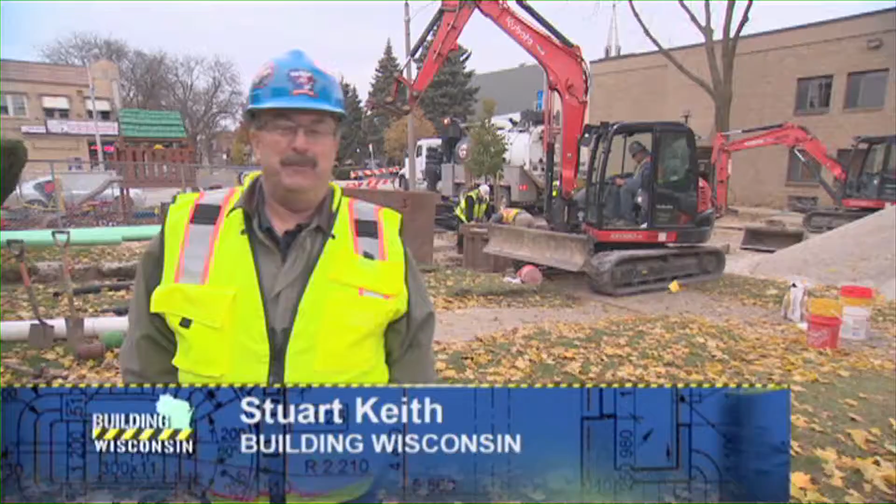Welcome to Building Wisconsin. I'm Stuart Keith, and on today's show, we're learning why and seeing how many sewer laterals are being replaced in the Milwaukee Metropolitan Sewerage District. So let's get started with Steve Breitlow from Plumbers 75.

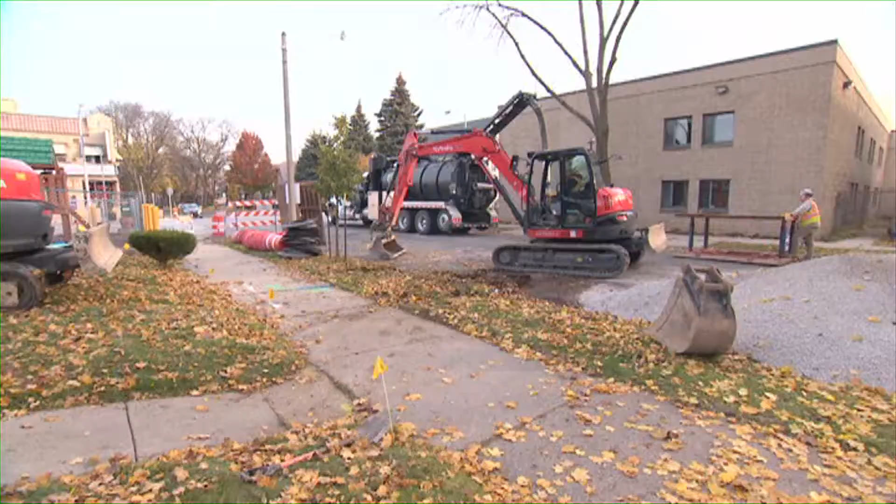Well, Steve, great to see you again here on Building Wisconsin. It looks like the guys are hard at work. What's going on here today?

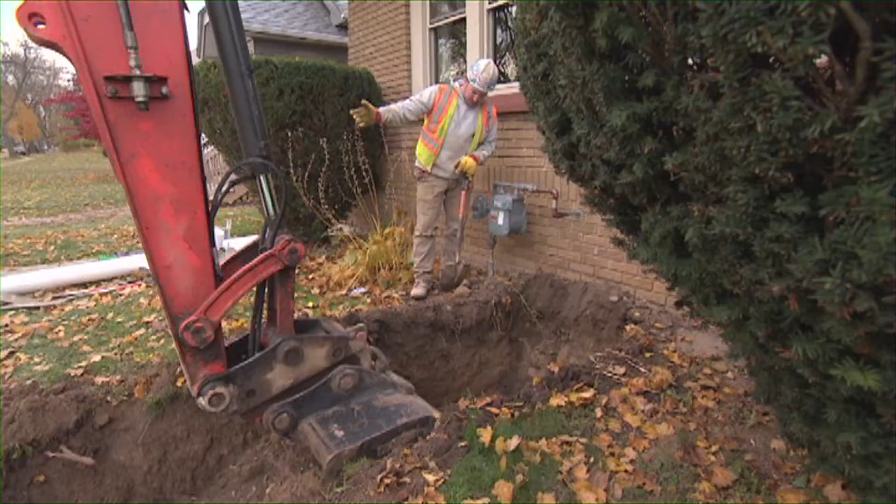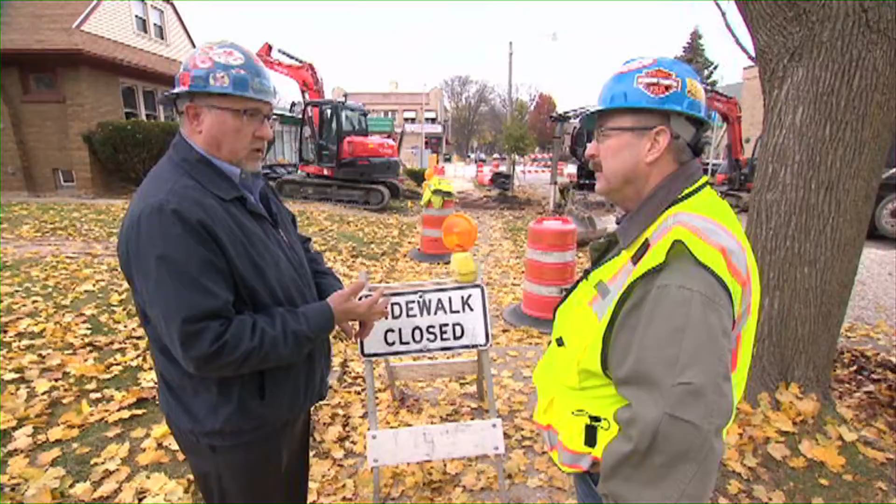This is a pretty interesting job. We've got an individual home here in the city of Milwaukee. They're replacing the sanitary sewer line, the storm sewer line, and replacing the lead service, all at the same time, in the same ditch. Why are they replacing it all?

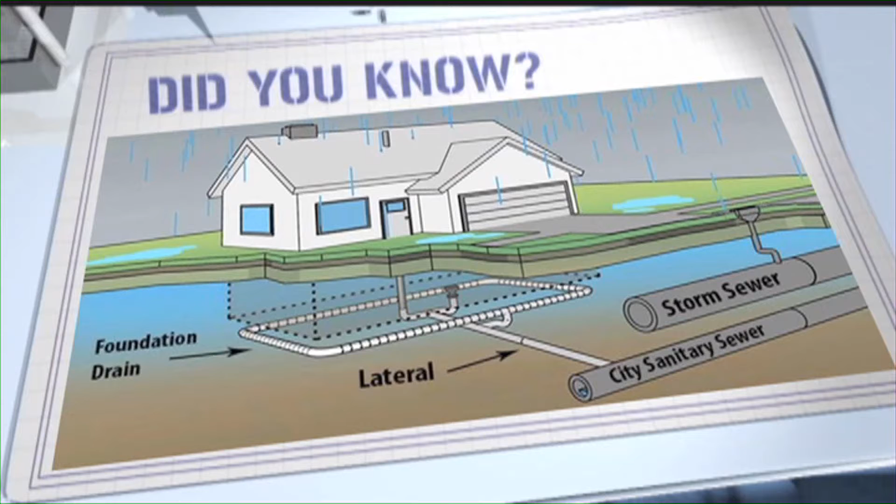Well, it's part of infrastructure. The city of Milwaukee's infrastructure is very old. There's been a lot of work done to replace the mains in the street, but the mains in the street aren't going to be as effective if the laterals going into the homes are still leaking and they're still combining storm and sanitary sewer going into the new lines. In years past, the storm and the sanitary sewers were tied together.

Problem is, MMSD is going to treat all that clear rainwater. So the idea is the cities are trying to separate the sanitary from the storm, so we're only treating the sanitary sewer water, not storm water.

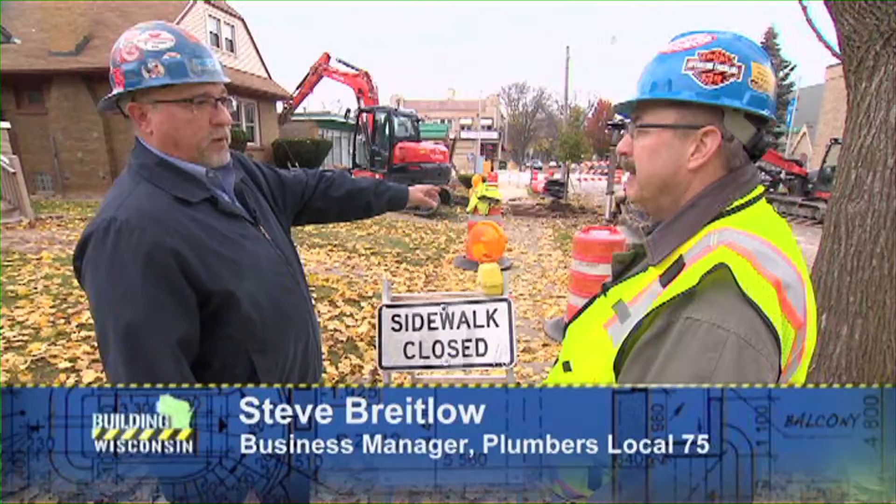Oh, and that's the homeowner's responsibility, those laterals, right? Correct. Yeah, the homeowners got to do their part and the city's got to do their part. And what's also kind of neat is MMSD now has got some grant programs to help make it more affordable for homeowners to get these hookups done.

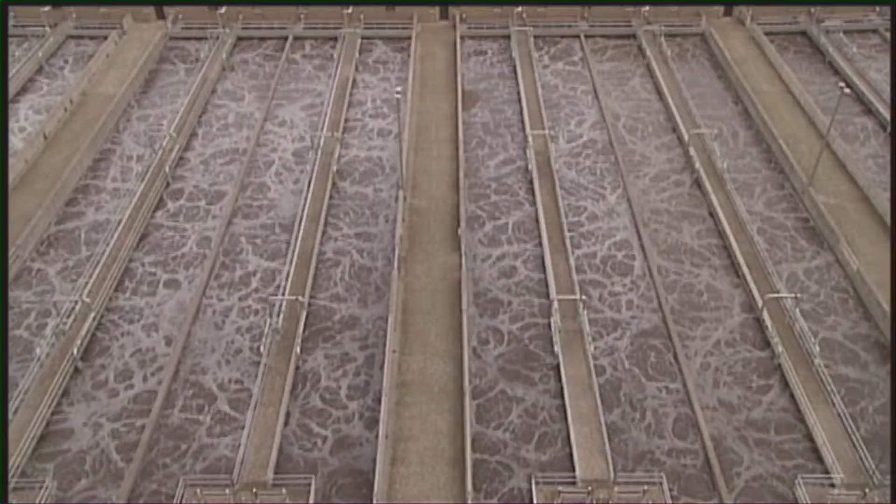And the more these get done, the better off we're going to be as being efficient, more cost effective. Treating all that stormwater is very expensive. It's going to be a much better upgrade for our whole infrastructure in the city.

It sounds like it's pretty complicated, and looking at the professionals that are working here, you have to be safe, you're working underground, not to mention the investment in equipment by Mid-City. You got a hydrovac, you got a couple excavators, you got dump trucks. This isn't weekend warrior work.

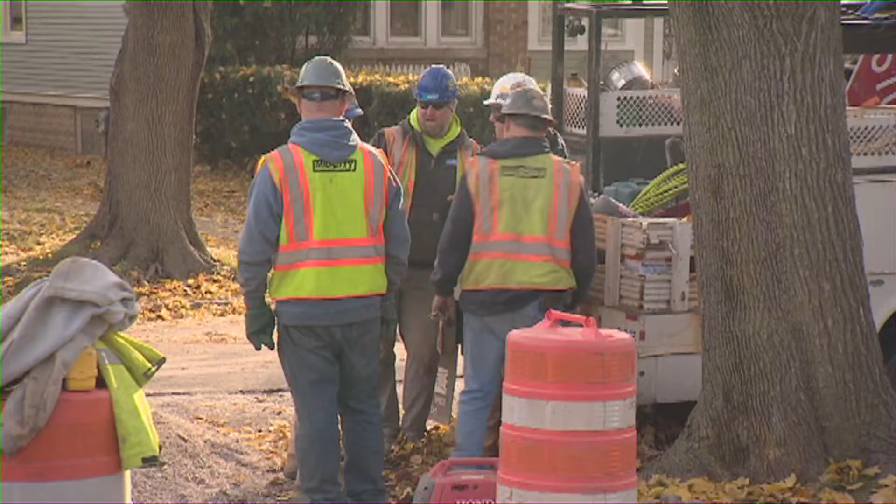Right. A lot of people think, you know, we're gonna dig a hole, we're gonna put a couple pipes in the ground, and think it's pretty simple, but this is a crew of operators, laborers, and plumbers, all highly trained. They're experienced working together.

There's an extreme amount of safety concerns, public concerns. We're shutting down the street, shutting down the sidewalk. Everybody's got to get through this in a day. Generally, you got to be done in less than a day from start to finish and get everything back up and running.

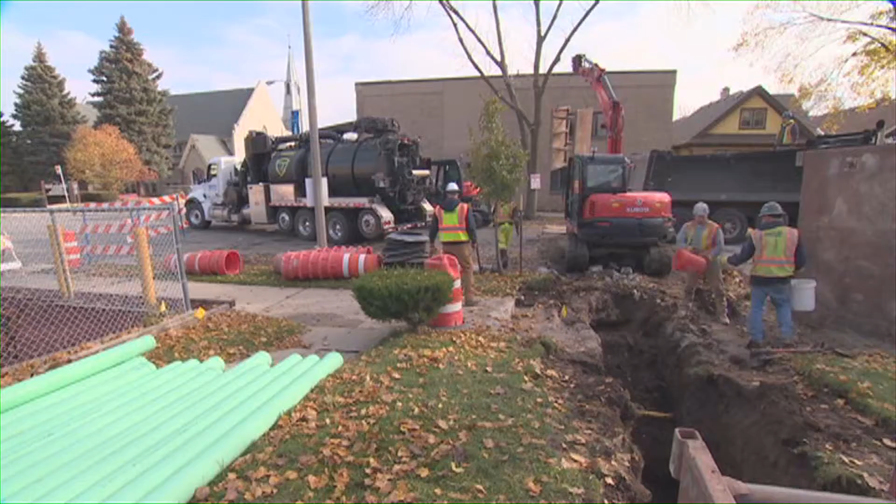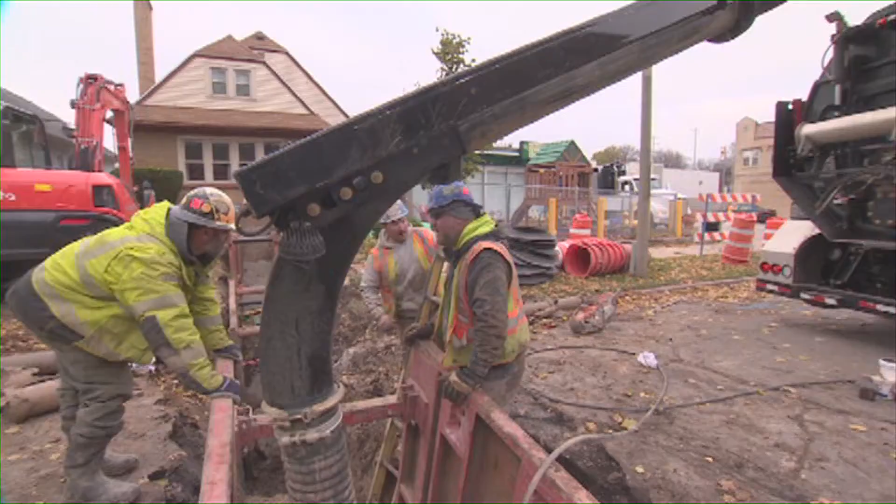The human resources are important and the skill training is great, but the amount of equipment and mechanical tools they got on this job to perform this work is incredible. And you need a highly skilled, coordinated crew to be able to pull that off effectively and safely.

Well, as our infrastructure continues to age, there's going to be more and more projects like this being done, and it's going to be great for the viewers to see and learn about what's being done and really question whether they need this type of work on their homes.

Well, they do, and you know what would be better is, right now we're doing one home, this is great, but you look at the amount of equipment and the amount of people it takes to do this job, so they're going to do this one project and pull up all this stuff and go move to another site. If somehow we could get coordinated where the city could do blocks at a time, we'd have a much better efficiency, get this stuff done quicker, and it would be a much more efficient way to do it. Again, it all comes back to good communication.

That's whether it's between you and your contractor or you and your neighbors, right? Exactly. Well, it's going to be fascinating to see this project. Who are we going to catch up with? Well, I guess we're going to be talking to Becky from MMSD and Tom Zoulek from Mid-City Plumbing, one of the principals of that company, and see how this infrastructure project goes from city to homeowner.

Well, infrastructure is at the top of a lot of people's minds these days. It's always in the news, and this is a great example of how it's not just big municipal projects. It relates directly to homeowners here in our community.

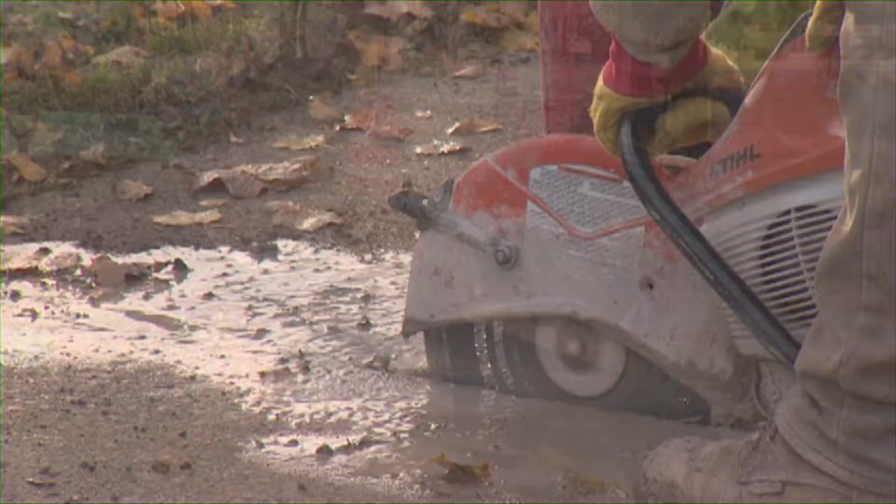They haven't been here that long, but they've made short work of this trench. So take us through what's going on at this location.

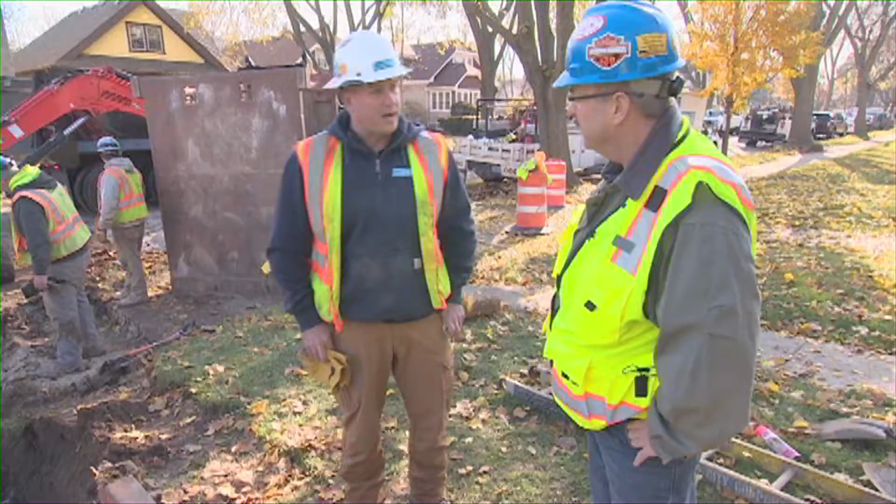This homeowner was notified by the city of Milwaukee that they had infiltration from the sanitary sewer getting into the municipal storm sewer. Well, how would they ever know that? The city was doing some public sewer work, and they went into the residents' homes and they did a dye test.

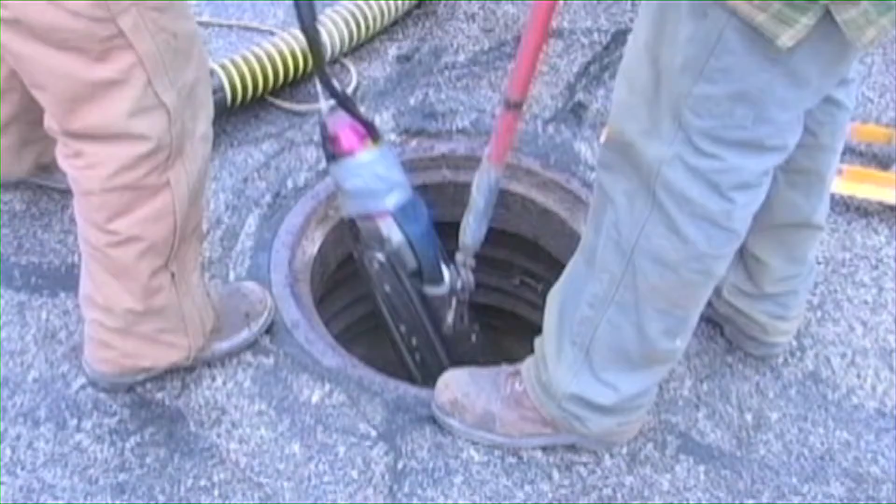Okay, now those dye tests, is that where they put the color essentially, or a marker in the toilet, they flush it? Correct. Ideally, that all goes into the sanitary main and goes down to MMSD, right? Correct, that wasn't the case here.

They flushed dye down and they wound up getting colored water into the storm sewer. Oh, you're kidding me. So that could be raw sewage going right into the storm sewer, which gets dumped into a lake or a river or wherever, right? Exactly. Is that a pretty common problem?

It can be. Certain areas, certain situations, alterations have been done. And so they then contacted you? Correct. So then the homeowner then is responsible to make that correction. And they knew it was on the privately owned section of the sewer.

So the process started with the homeowner reaching out to different contractors. We were one of them, saying that he was given orders by the city of Milwaukee that he had to fix this infiltration problem.

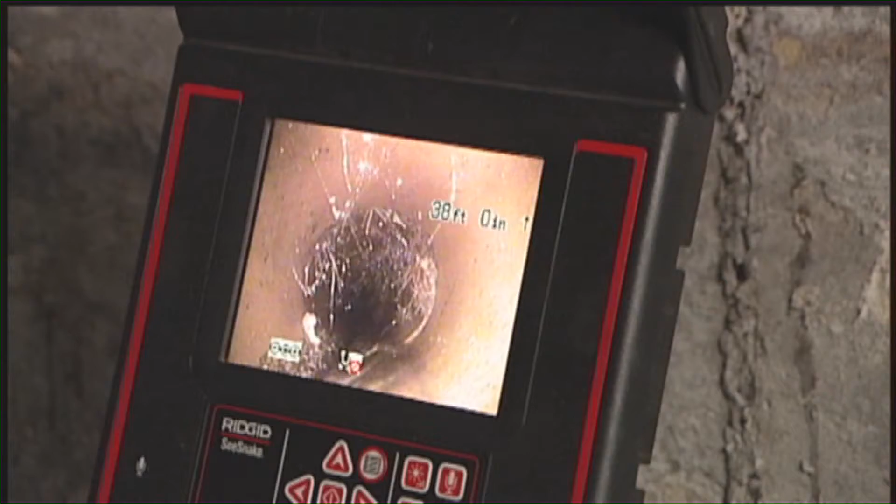We came out, we cameraed the sewer, and we found that out there in the street underneath a 48-inch water main, the sanitary sewer was broken, and right next to it was his private storm sewer, which was also broken.

Oh my gosh, so both of his sewer laterals, the storm and the sanitary, were broken, combining and just being dumped into the storm sewer? Exactly. Oh my gosh. Okay, and so you said that you stuck a camera down there.

Now, did I see that those are all clay pipes? Yes, so this house will be vintage 1930s, 1940s, should be 30-inch long clay pipes, cement mortared together.

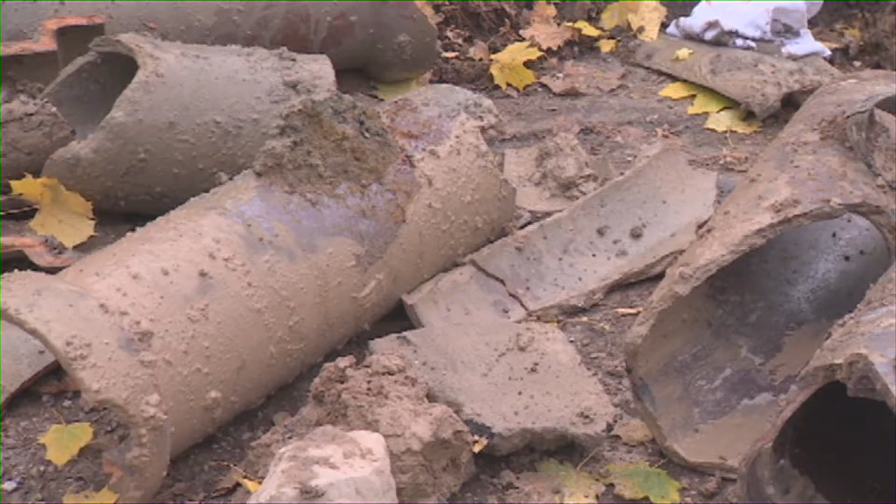And you said that there's two different types of sewers coming out of the house. There's a storm sewer and a sanitary sewer. Do all homes have both of those going out? No, not all homes. This section of the city of Milwaukee has separated sewers, so it has storm and sanitary in it. Some areas only have sanitary, some areas are combination.

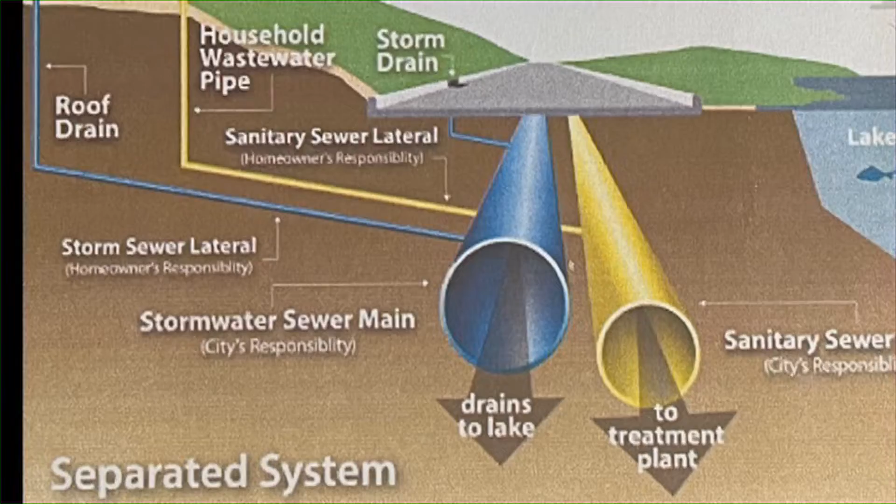What's carried in each one? Sanitary sewer is going to be all of your normal waste from inside, your toilet, your kitchen sink, the lavatories. Storm sewer on this house is downspouts.

Okay, so just downspouts. Would there also be drain tile ever tied into it? There is drain tile in this house, but because of the age of the house, it didn't have a sump pump. Now a sump pump could go to the storm sewer. Here, this drain tile went to the sanitary sewer.

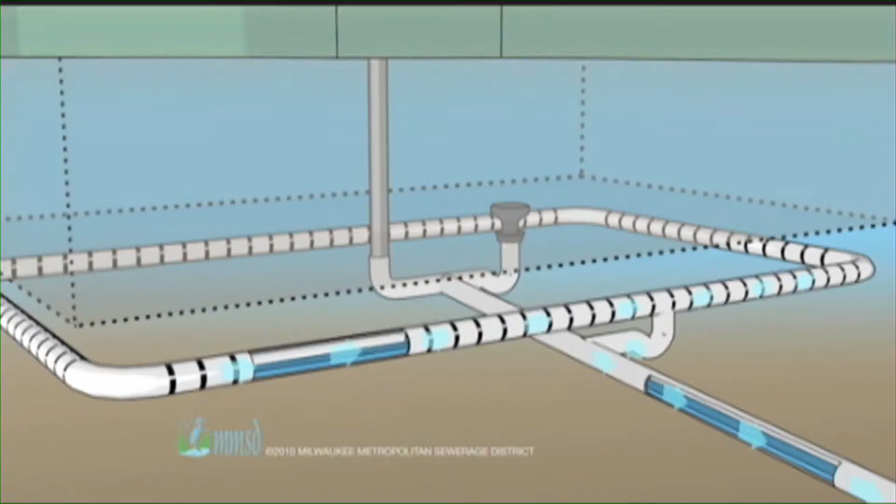So what are you actually doing to replace it? I mean, obviously there's a trench here, but what materials are you using? We started inside the house, broke a hole inside the house. We're starting from the clean out inside, which is just inside that basement wall. And we're laying with new PVC pipe out to the main and going to connect to the main.

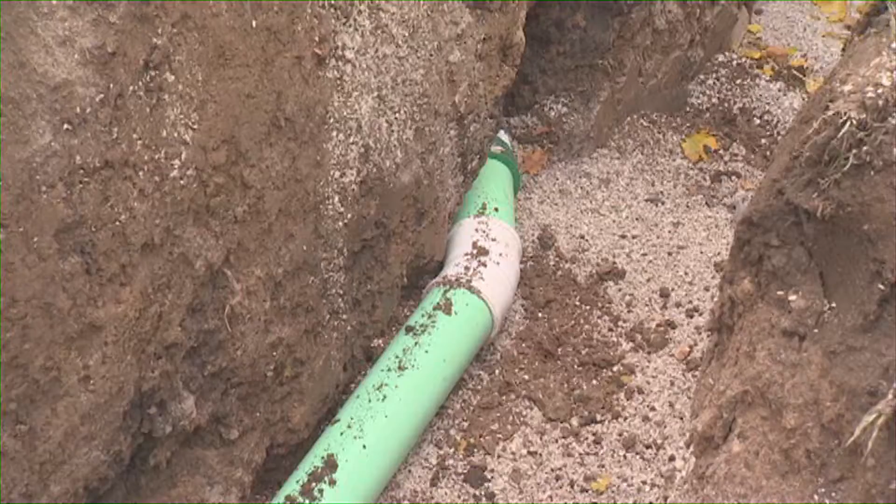So we're replacing the sanitary sewer. We're going to replace the section of the storm sewer that we expose. And this house happened to have a lead water service. We're going to replace the lead water service at the same time.

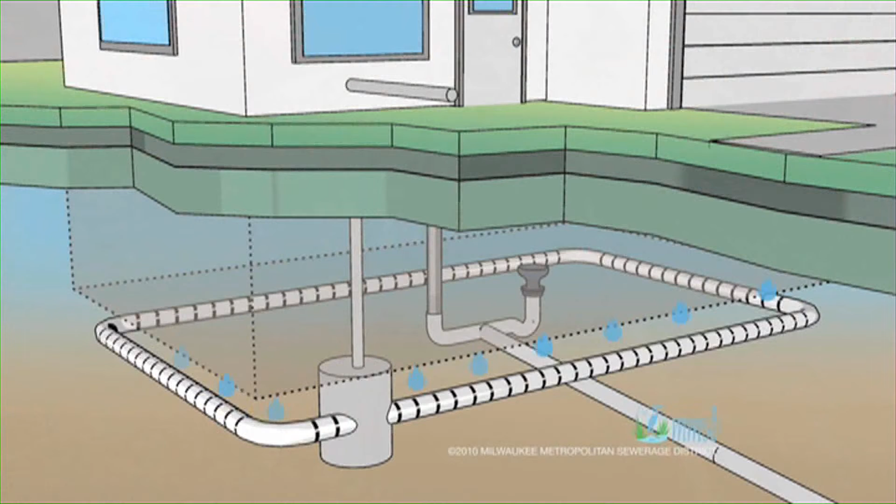That makes sense. I know we did a show on that previously, and that's really important. You know, replace it when the opportunity arises. And since they're sharing the same trench, it makes sense. It would be very difficult not to do all of them at the same time. And as part of this, we're going to eliminate that infiltration of the interior drain tile getting to the sanitary sewer, and we're going to put a sump pump in.

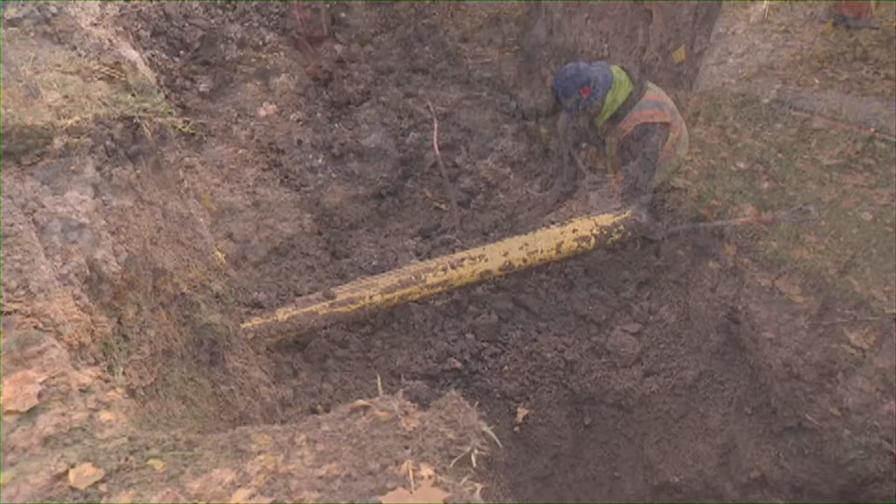Okay, so it's a pretty intense job. And when I say intense, yeah, in all the logistics of getting it done, but more importantly, the safety. I mean, this is big equipment. Heck, you have a hydrovac there, you have the excavators. You're digging underground. We did a previous show on Building Wisconsin on underground utilities. You never know what you're gonna find down there. That all adds up to a very volatile situation if you're not properly trained, right?

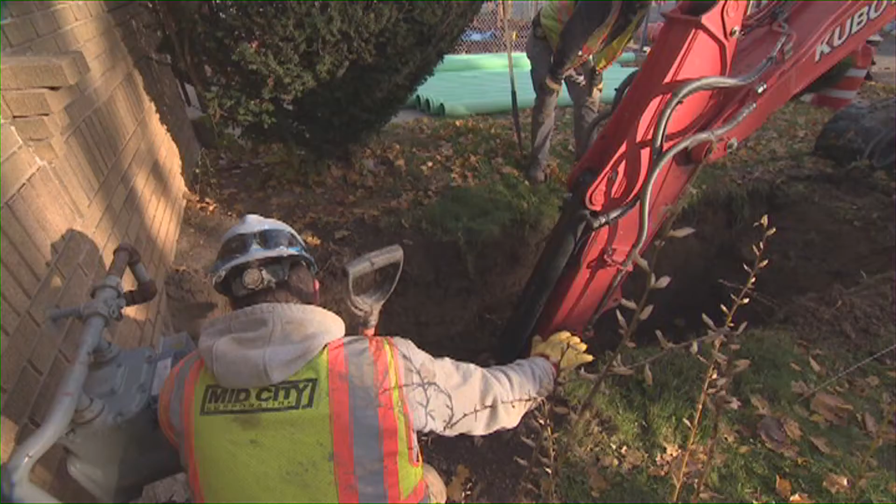Correct. Have to have trained professionals. We have trained plumbers, laborers, and operators out here that do this on a daily basis, been doing it for many years. They know what they're doing here. And at the end of the day, you want everybody to go back, and you don't want anything to happen. This is a great case in point. Do you guys do quite a few of these jobs? Yeah, we'll do hundreds of these in the course of a year.

Wow, that's crazy. Okay, well, before we got to this stage of the process, what got it started? So, as I mentioned, we came out, we cameraed the sewer. We found the problem. We talked to the homeowner, gave them a price. They decided to go with us on this. We also then invoked the MMSD Pipecheck program to help us with that. That's going to help give the homeowner some rebate dollars towards this work.

Then we planned out Digger's Hotline, prep for the job, find out what utilities are in here. Then we coordinated with the homeowner for entry, trying to get this work done in the course of 1 to 2 days at most, so that there's the least amount of inconvenience to them. And then proper planning on our part and the homeowner's part - he had to move things out of the way. We have to have the materials ready, the equipment ready, the hydrovacs here, so on and so forth.

Sure, and you guys showed up here around 7 o'clock this morning. How long is it going to take to complete? Correct. We hope to be almost 100% complete by the end of today. Wow, that's awesome, and that's a mark of true professionals. You get in here, get the job done correctly, and get it finished.

I want to learn more about the process when it's a little further along. Right now I'm going to catch up with Becky from MMSD to learn more about that Pipecheck program.

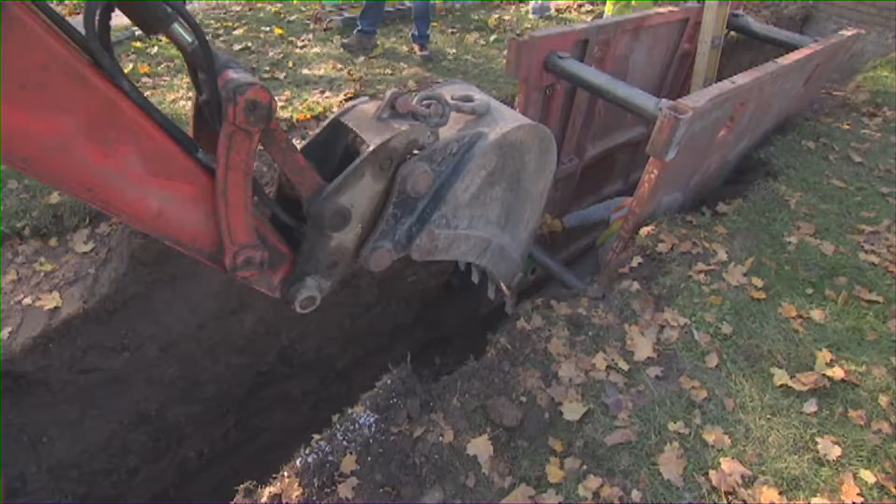Well Becky, really appreciate you coming on Building Wisconsin today. I was just talking with Tom about what's going on at this home, and we wanted to catch up with you on a couple things. One, to learn more about that Pipecheck program. But before we learn about that, let's talk about this situation and how many of these exist around the city of Milwaukee and beyond. Most homeowners don't realize that they are actually responsible for doing all the maintenance and care of their sanitary sewer lateral.

So most homeowners do very little day-to-day to make sure that the health of their sanitary lateral is in good condition. And when you talk about the health, this one was unhealthy because it was crushed underneath the water main, and all the raw sewage had been leaking into the storm sewer, which ultimately ends up in either a lake, a river, a stream, wherever.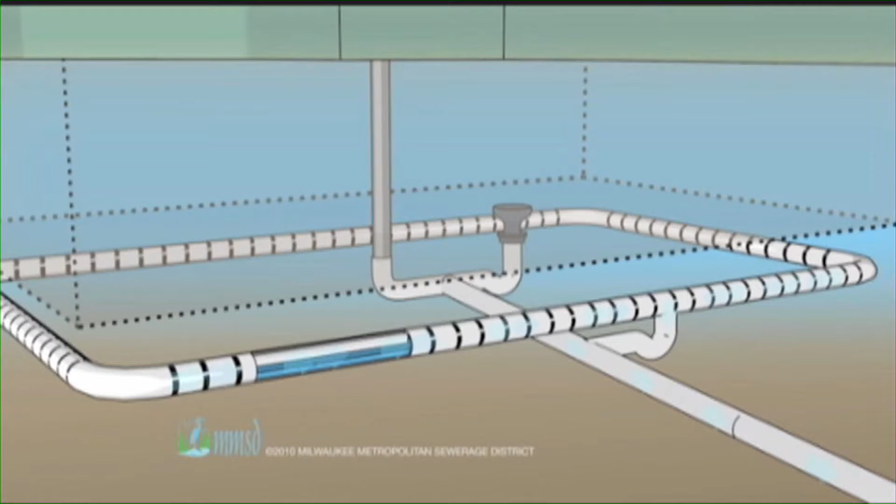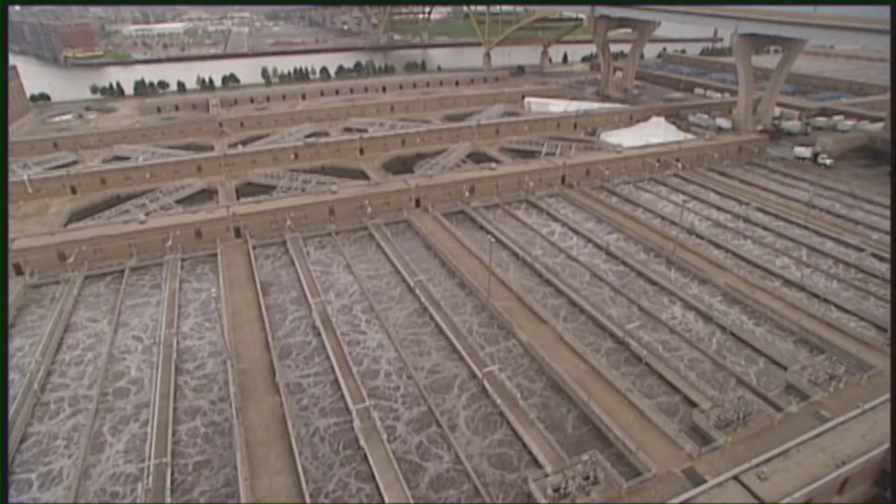That is very correct, and it is a significant issue that we have throughout the whole Milwaukee County area. We really have identified that private property is one of our major sources of clear water getting into our sanitary sewer system. And additional clean water getting into our sanitary sewer system just means that we have more water that we have to clean, which was once clean and now dirty because it got mixed in with sanitary waste.

Okay, so let me get this straight. Not only is the raw sewage a problem getting into the storm sewer, MMSD, you guys are concerned about clear water, rainwater essentially, leaking into the sanitary sewer and overloading the system?

Yes, that is correct. What happens is during major rain events, groundwater and downspouts and sump pumps, if they're connected to your sanitary sewer or your sanitary lateral is in poor condition, that extra clean water is getting into the collection system and adding a bunch of additional water that isn't supposed to be there.

So what you're saying is any of the drain tile that's underneath the foundation or underneath the basement floor, a lot of those are tied into the sanitary line? Yeah, it was traditional construction pre-1954 that builders were allowed to connect the foundation drains directly to your sanitary sewer lateral. So that's adding a significant portion of clean water during rain events and even during normal everyday weather.

Well, a lot of this is out of sight, out of mind for homeowners. How do I know as a homeowner, if I have a problem or I'm contributing to the problem?

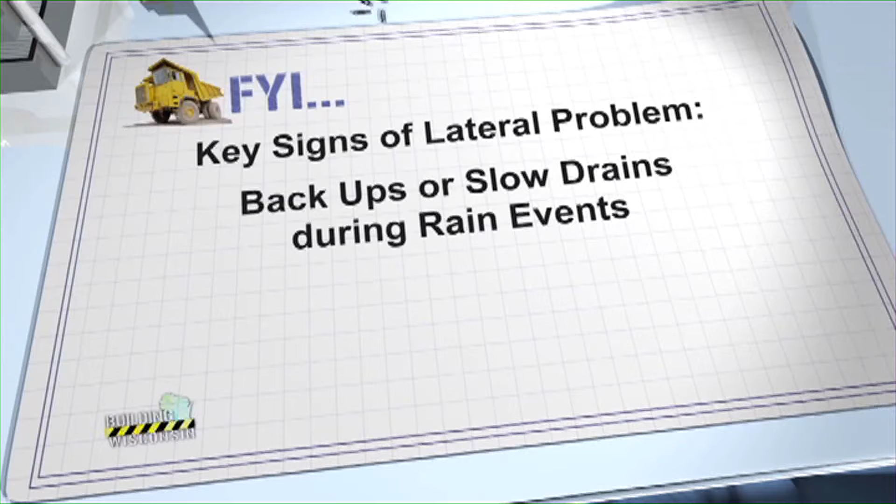Well, if you have to call someone to clean out your lateral on a regular basis because you have slow drains, especially during major rain events. Also, if you have a lot of roots or backups and you have to get your lateral cleaned. And if you have any signs of backups in your basement, possibly when you aren't there, where you possibly have some debris around your floor drain, those are all signs that you need to take some action to look into the condition of your lateral.

So probably a good idea if you're a prudent homeowner, contact somebody like a mid-city or a plumber. Get out here, send a camera down the line, and that can pretty much tell you if you have an issue or you don't. Yes, that is a wonderful idea.

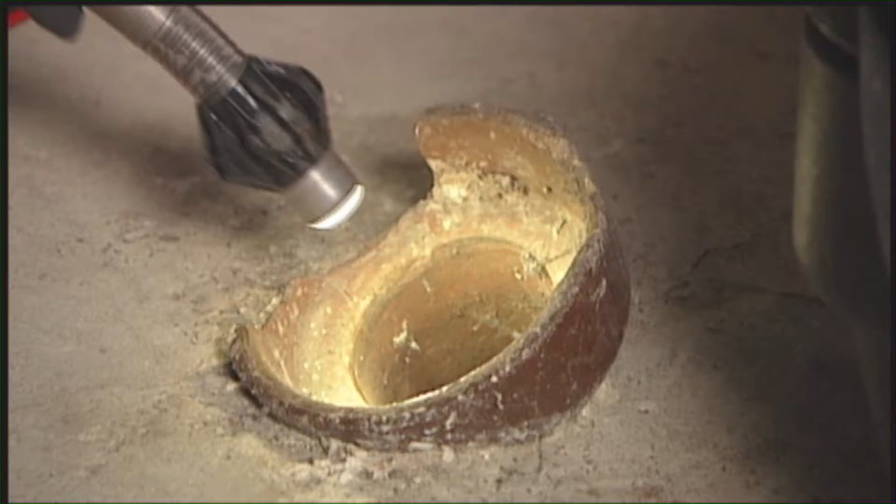And in fact, you want to make sure that your plumber who you hire to come do an inspection of your lateral also has the capability to televise your lateral. Because really you need to be able to see the inside condition to really know where you're at if needing to have replacement completed or not.

Yeah, that makes sense. Well, let's head around the side because I know there's some other areas that are leading to clear water entering this system.

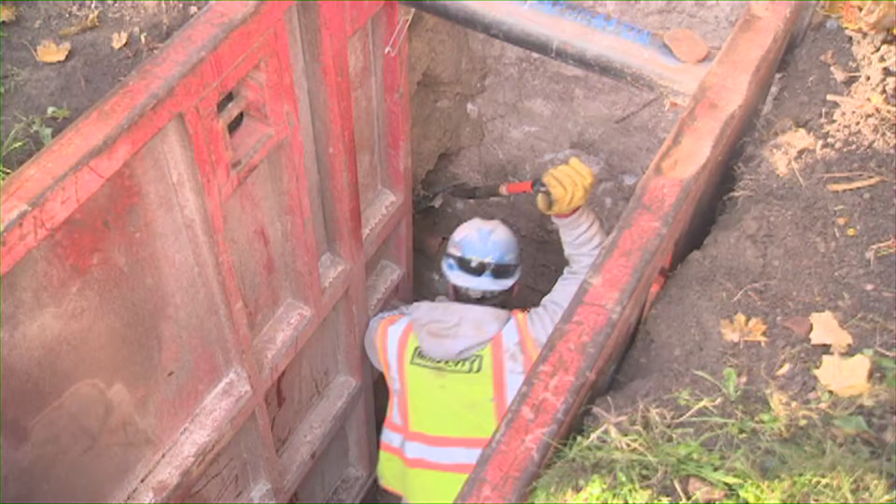When Tom and I were talking earlier, we were saying how most homes have eaves trough or gutters and they have downspouts. And in this particular case, this downspout is being tied right into the storm sewer, and they're going to have to leave it there because they don't want to create an ice hazard by just having it spill on the sidewalk. That is correct.

Many homes built in that pre-1954 time period actually connected their downspouts into their sanitary sewer laterals because it was safer and more efficient for them to deal with the stormwater at that time. But as we spoke about earlier, that's not the best case for our current conditions. So in this case, they are installing this downspout into an improved storm lateral, because in this municipality, they require that all downspouts be connected to a storm lateral, which therefore keeps the clean water and the sanitary sewer water in two separate locations.

And that's what you were saying is so important. You don't want to mix those. That is correct. And in this case, it also reduces your safety risk in this situation because you aren't creating an icy sidewalk that the homeowner has to walk on.

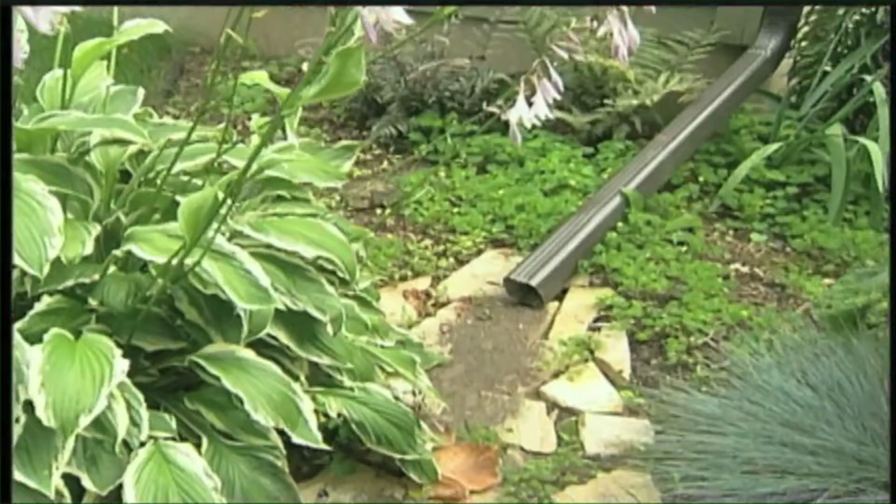Sure. Are there any other alternatives? One option is to disconnect your downspouts from the connection that goes into the ground and make sure it drains to 3 feet away from the foundation of your home. Or you can also look at putting in some green infrastructure such as a rain garden or a rain barrel, which helps deal with your rainwater.

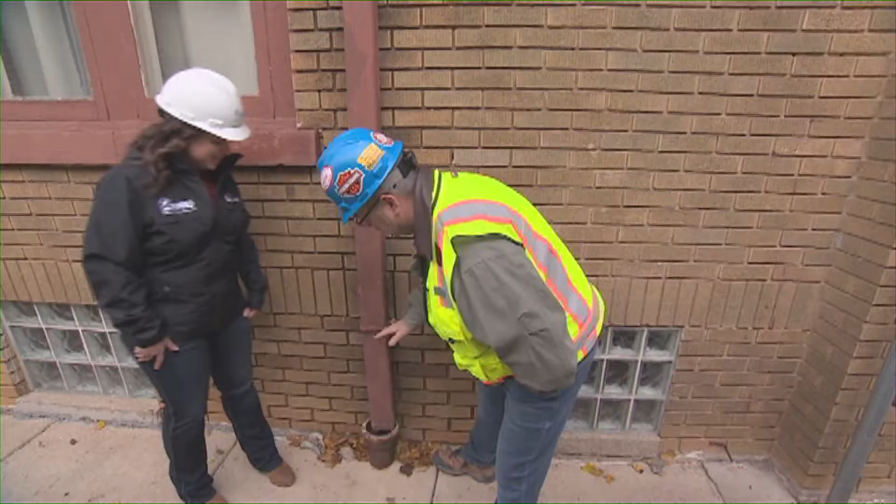Yeah, again, we did a previous show on those rain gardens. Those are awesome, but to your first point, saying how you could extend this out maybe 3 to 6 or 8 feet out, I've seen those where they're hinged, and if you need to mow, you can tilt it up and get underneath it, but obviously in a tight quarters like this along a sidewalk, that'd be a trip hazard. So they really have no choice but to tie it in to a new and improved storm sewer lateral, right?

That is correct for this situation. Well, Tom also mentioned that the drain tile or the foundation drains underneath the basement floor, they're going to be disconnected, and they're going to be putting in a new sump crock down there and then discharging that clear water out back. Let's go take a look.

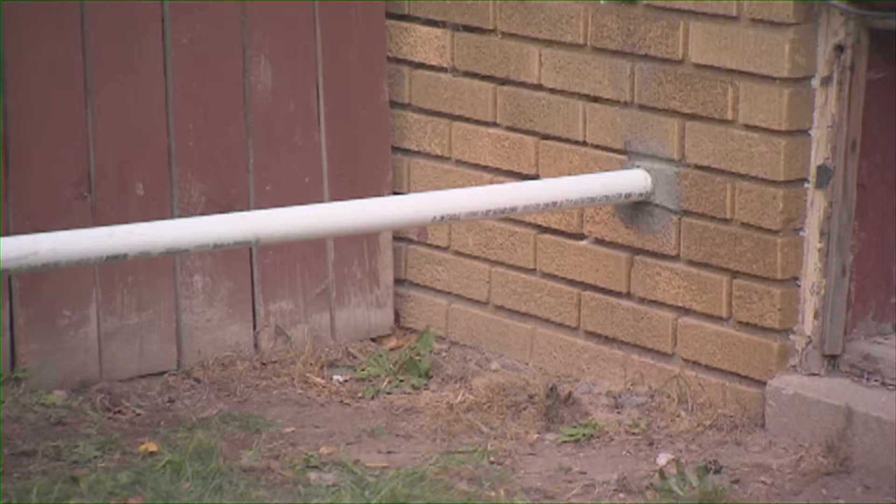So Stu, right here is where we're going to have the discharge of the sump pump come out. What will happen is we'll have a PVC section come out of the home, and then we'll put in a flexible pipe and get at least 6 feet away from the home to discharge the sump pump.

Sure, and this makes sense because I look at this low area here, perfect spot for a rain garden. From past shows, I remember it's so important to keep all that clear water, whether it's rainwater or snow melt, on location. That's where it's meant to be. It does a world of good to the environment, helps our communities out, keeping it here, not overflowing the system.

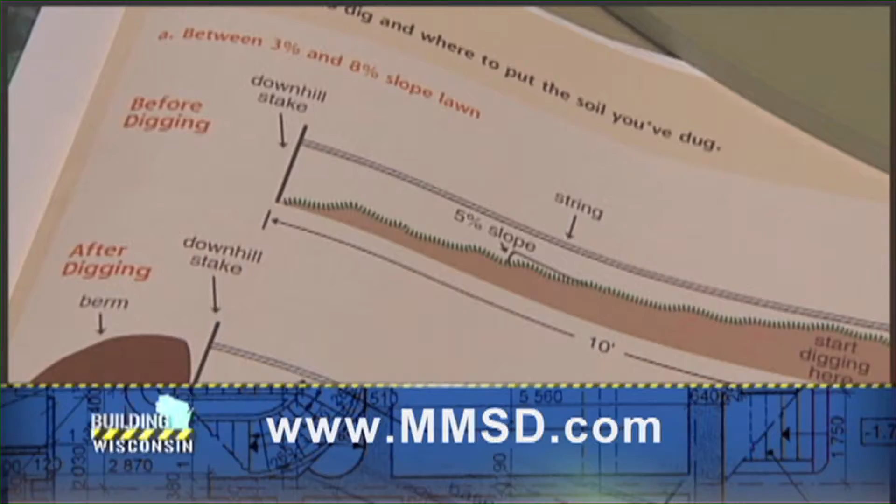That is correct. And if you go to MMSD.com, we have a lot of great information on how to install a rain garden, and we also sell rain barrels you can look at installing. Sure, I look at it as free water. Why not take advantage of it, and you can create something beautiful in your backyard.

So far in today's show, we've been talking about a very worrisome topic, right? All this storm sewer getting mixed up with the sanitary sewer, and a homeowner doesn't want to hear that. But if it does happen, the good news is they can take solace in the fact that you guys have this new program called Pipecheck that can help financially in some situations, right?

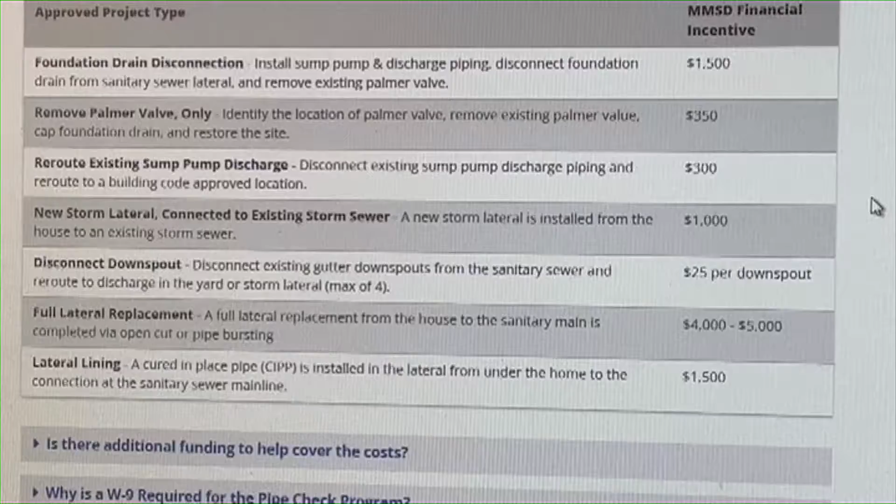That's correct, Stu. We recently started a Pipecheck program which provides a financial incentive to 1 and 2 family homeowners that can offset the cost of the work to do your foundation drain disconnect, your downspout disconnects, and most importantly, the most expensive cost, that lateral repair or replacement.

And that's for homeowners within your service area? That is correct. You do have to live within the MMSD service area to participate in that program.

So once again, it's probably best for homeowners watching today's show, if you own a house within the service area, go to the website. You have a plethora of information there that can help you educate yourself and actually find a certified contractor, right?

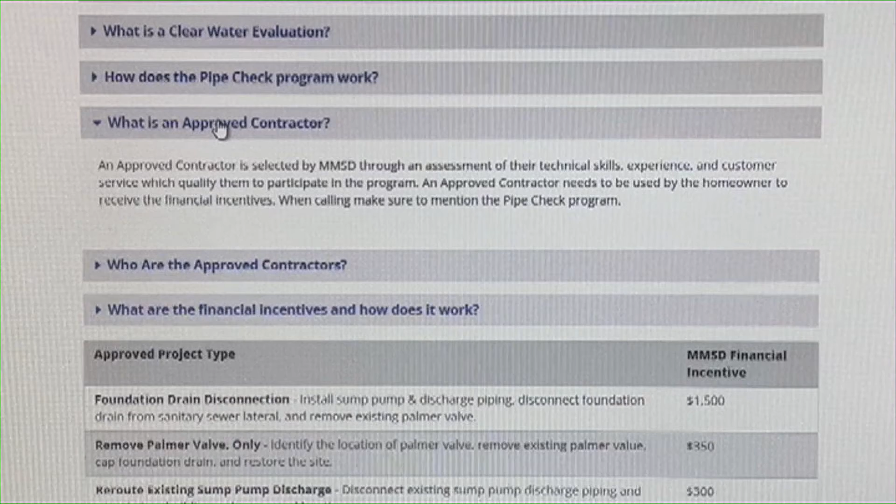That is correct. On our Pipecheck website off of the MMSD.com site, we have lots of information on how to qualify for this program, how the program works, and most importantly, which contractors you can use to participate in the program.

As we've seen so far in today's show, and will continue to see until the process is completed, you want to get the right contractor, someone knowledgeable and highly skilled to get the job done correctly. That is correct, because there are so many options, and it all depends on what's most appropriate for your specific home. Working with your contractor will give you the best education and help you make the most educated decision.

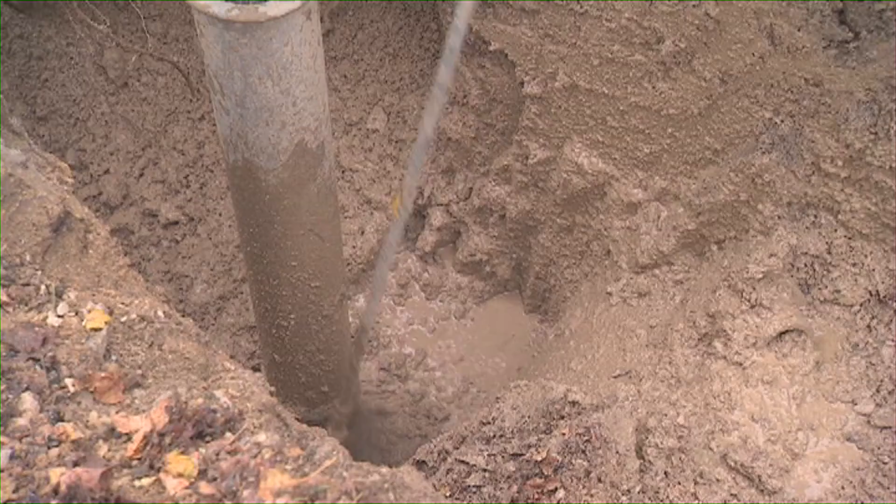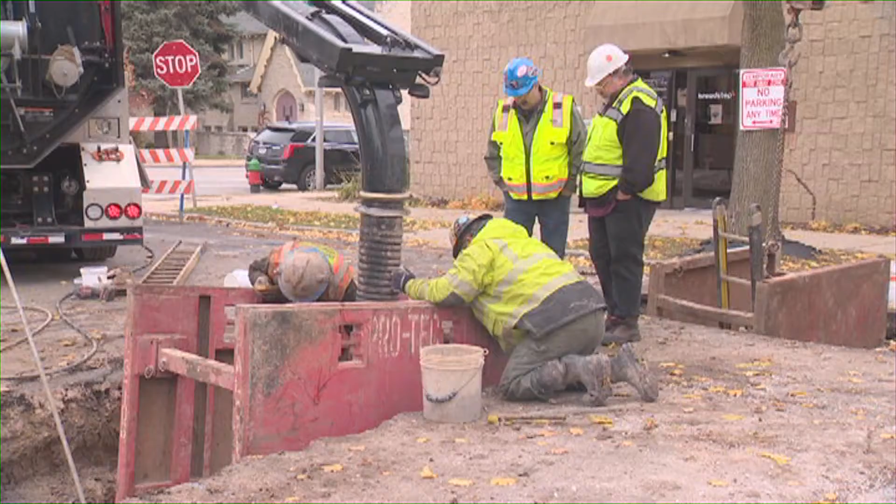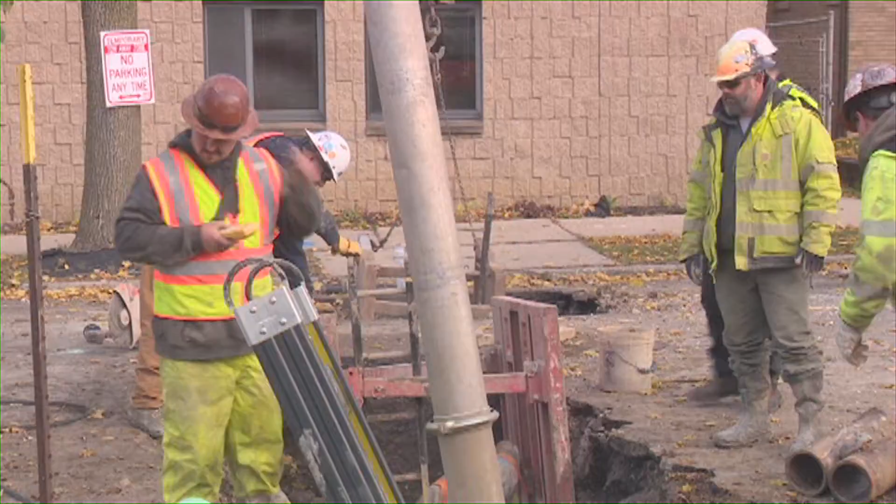Well Tom, it's been about 4 hours since we last spoke, and the guys are making great progress on this. As I was looking at this old clay piping, this is from the sanitary sewer line, that's all totally plugged. It was broken down there, and all that dirt came in. So no wonder the raw sewage wasn't going into the sanitary main line—it was just going into the storm sewer out to the lake.

Correct. So what we found, we found two major problems. We found a collapsed mainline storm sewer, which caused the sanitary and the storm lateral to fail. We also found an improper connection to the sanitary sewer, which caused a failure as well.

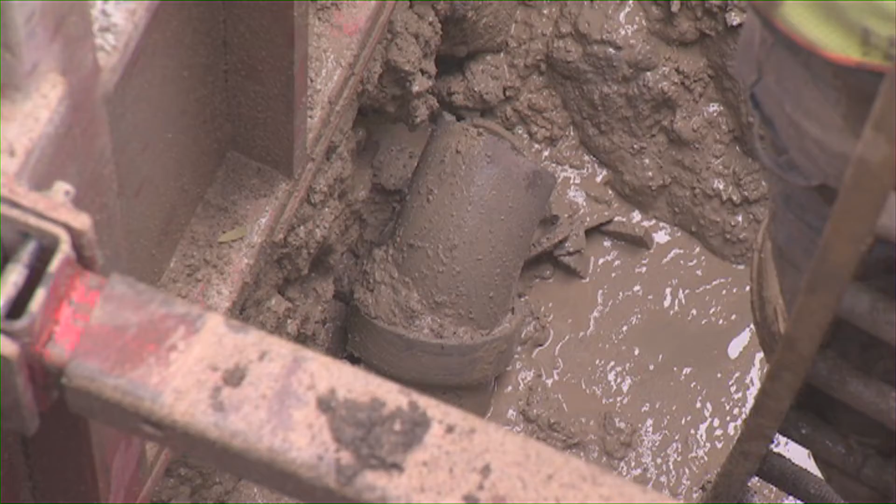You don't sound too surprised though, you've run into this before? Ran into it all kinds of times.

Oh my gosh, and if there's a collapsed main storm sewer line, that's the responsibility of the city. Are they going to have to come out here and re-dig everything up? Correct. So they came out, they looked at it, they saw what's wrong. They're going to contract with Mid-City to take care of that.

Okay, so that's good. Since you guys already have the trench there, it makes sense for you to bring in probably different equipment, but can you get it done pretty quickly? Yeah, we'll be done by end of day tomorrow.

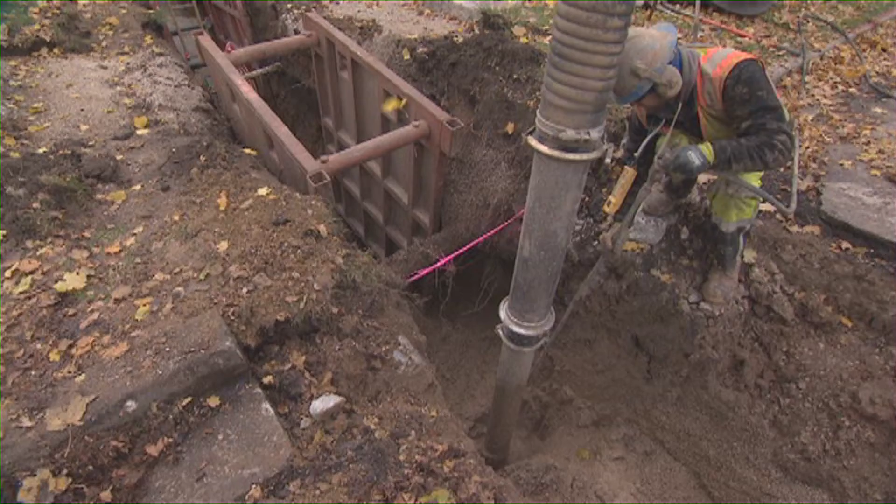So this project you're hoping to get done in a day, but because you ran into a few different things, you can still get it done pretty quickly and have it done tomorrow. But will the homeowners have use of their sanitary system? By the end of today, they'll have water on, sanitary sewer will be 100% complete.

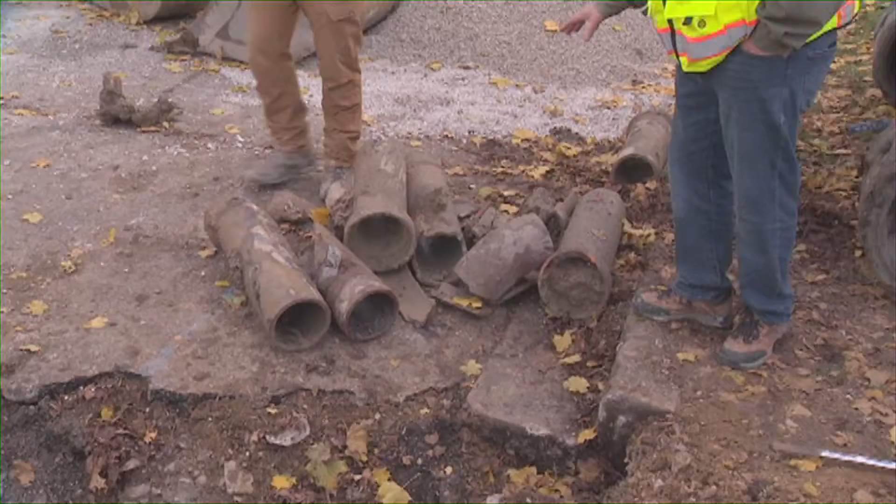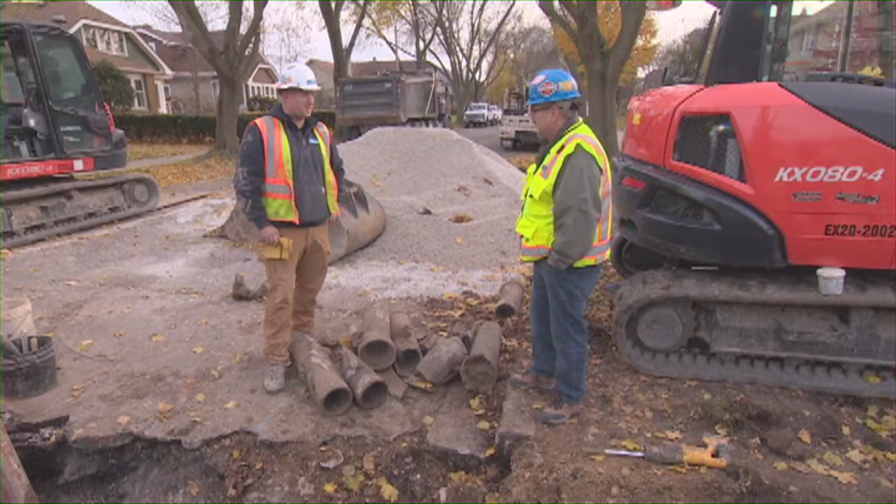This is all the old clay pipe, and you can see how easily it's breaking. It's probably 100 years old, and there's probably miles and miles of this type of piping failing throughout the Milwaukee metropolitan area. Every house up and down the street has this same pipe. That's scary—hopefully you get the word out and they get it fixed.

Now, when I look in here, that is a deep hole. That's got to be close to 14 feet. Yeah, we're about 14 feet for the storm sewer, about 12 feet for the sanitary. And what is this huge pipe right here? It's a 48-inch water main, transmission main for Milwaukee Waterworks.

So this is just a transmission main, it doesn't serve this home. The main on the other side serves the house, but this is a distribution transmission main. Is that considered pretty big? Yeah, City of Milwaukee goes up to, I believe, 60-inch water main. Holy cow, so you have to negotiate around that.

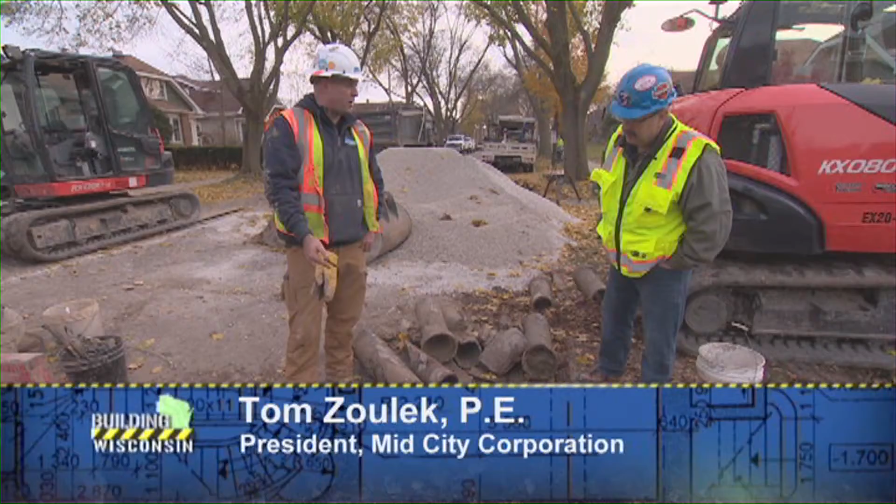Being very careful—the sewer lines are all gravity run, right? Correct, so you have to go underneath that and make sure you have the proper pitch coming from the house down to the main lines. This is a different scenario because the storm sewer is so deep in the street, but it's so deep because of this water main. Typically the storm sewer would be 5 to 6 feet deep, but because of this interference, they have the storm sewer deep and then come underneath the water main, which would typically be on top, but because of the depth, both are underneath. Makes it a little more challenging, a little more unique.

Now what piping are you using to replace the old clay tile? PVC pipe—you have two different types. Within 5 feet of the building, Schedule 40 PVC, 6-inch. Out here, SDR 35 PVC. And it sounds like the latest and greatest, so these homeowners are never going to have to worry about failure in the future. Correct, and it's the most popular material used.

I just marvel at the guys working here. Even though you have all the latest, greatest equipment, there's a lot of hands-on work, and look how dirty it is. These guys really earn their living, they really have to know what they're doing. The equipment only can do so much—it's the guys that operate it, know where to dig, how to lay the pipe, true craftsmen. Yeah, they're artists down here, and people might laugh and say look how dirty they are, but they're doing a great job.

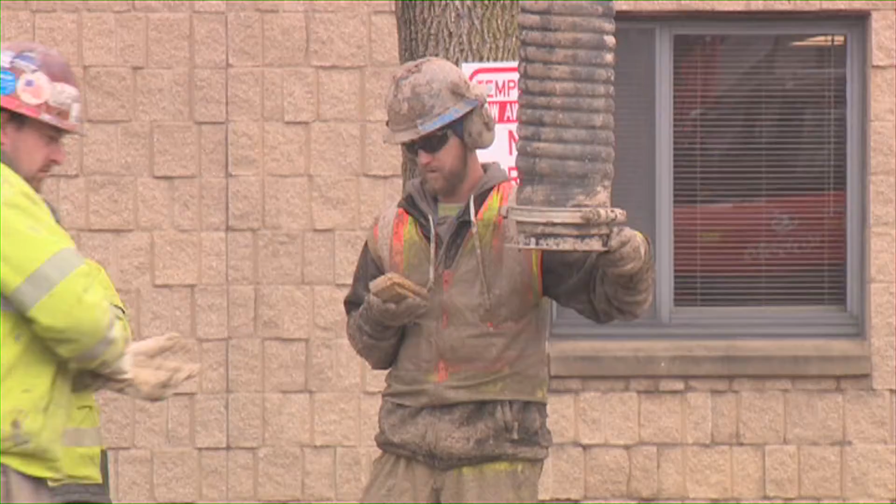To finish up the project, you need to have the inspector come out. I noticed he was here. Correct, City of Milwaukee inspected this morning, did a partial inspection, and they're doing a final inspection right now. They'll be doing a dye test, and then we'll be complete. That'll take care of all the connections here. It needs to be backfilled.

What will you use to backfill it? In the road, we'll use aggregate slurry. We'll use compacted granular backfill up in the yard. And then that'll take care of everything on the outside of the house. I know earlier you mentioned putting in some different components downstairs—can we go take a look at that? Yeah, let's go do it.

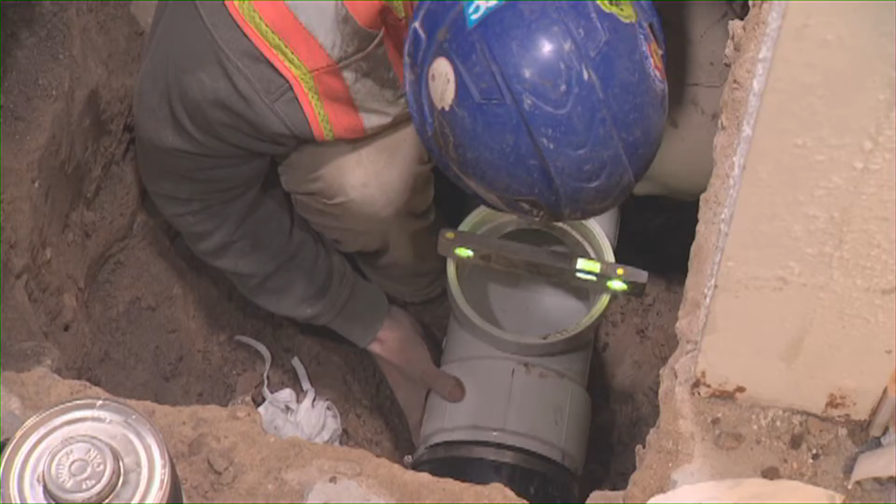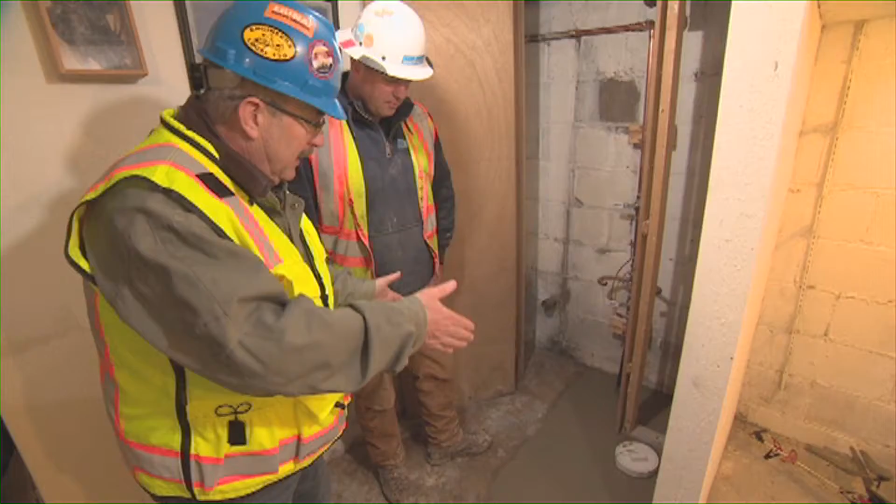So over here, earlier you saw the floor was broken up, the sewer was exposed. Now we're complete. Yeah, it looks just beautiful. Now when it was open, it was pretty deep because it went all the way underneath the footings? Correct, typical City of Milwaukee house, conventional footing, a couple feet below the footing, it went underneath. That's not the case in every house—it can be challenging. This goes back to planning the job out, figuring out how you're going to do it: finished basement, does the house have a porch across it?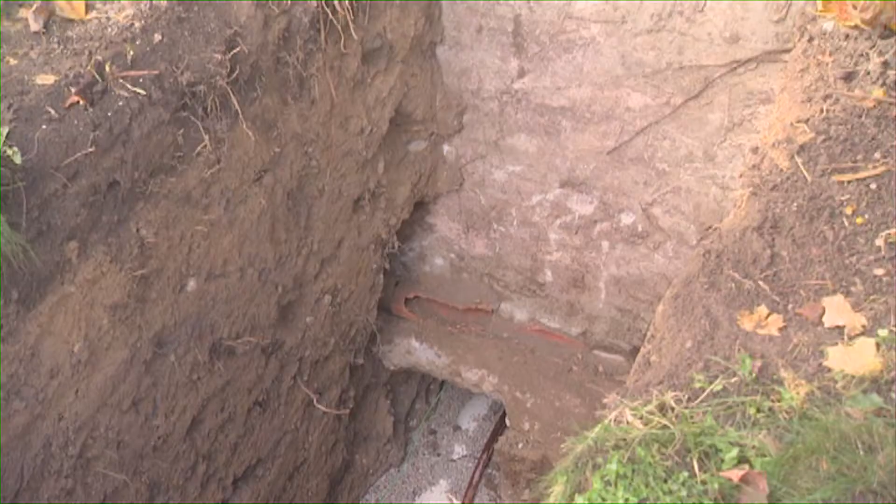Maybe we weren't able to dig all the way in, maybe we would have had a pipe burst part of this or directional drill part of it. So every house is unique and different. That speaks volumes to the importance of communication for a homeowner with the contractor. Most definitely, and that plays into the cost, but you get your best value when you have good communication and understand all your options. A good contractor will lead you to the option that's best for your situation. A contractor that's been doing it for a long time has seen all these situations and can guide you in the right direction.

So is that the clean out? Yes, this is a new sanitary sewer clean out, a mainline clean out, full 6-inch clean out. They didn't have that before, they had a 3-inch clean out. Tracer wire, I believe you saw that outside, ran all the way out to the street. That's in case you ever need to find it again. Correct, so now we have a non-metallic pipe for the sewer, it's code required to have a tracer wire on it, so you'll be able to hook onto that wire and walk out with a locating device and find where your sewer is.

Somebody might be watching and say, well, what's the big deal, you went with a 6-inch clean out, why is that important? Because you can run a full-size cutter through it to clean your sewer. If for some reason you ever had to clean the sewer, now you can get a full-size cutter down it. We weren't able to do that before. Awesome, that's great to know.

And then it looks like all new copper coming in too. Yep, so here's our new 1-inch copper water service. We tape it when it goes through the concrete so the concrete's not in contact with the copper pipe. New ground strap, new meter setting, City of Milwaukee spec, and then tied back into the existing distribution system. Again, the mark of true professionals. Look at how nice that looks, it looks even nicer than the existing concrete, which is a great way to leave it.

But this didn't finish the job. You mentioned earlier there's also a new sump crock. Correct, that's in the back. Let's go take a look.

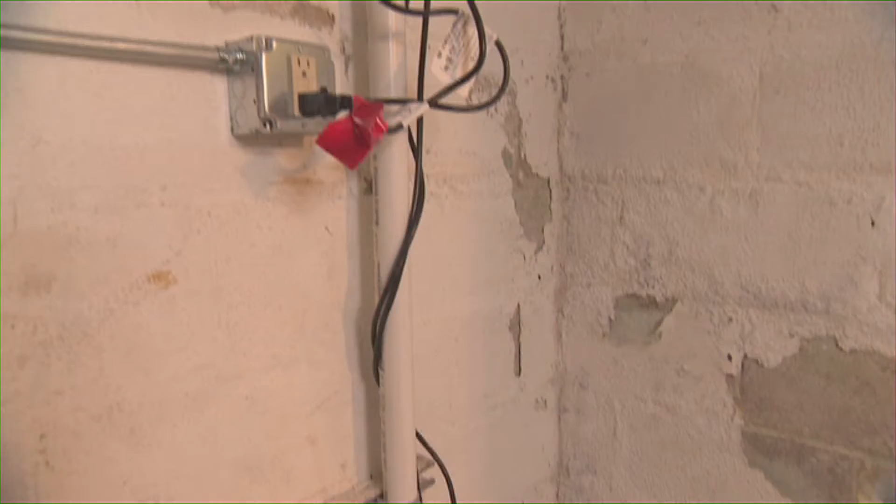So Stu, as we were talking about earlier, this house did not have a sump pump prior to this. Their foundation drains went to the sanitary sewer. And that's pretty common in the Milwaukee area, right? Because pre-1954, they could tie foundation drains right into the sanitary sewer, and we don't want that to happen because it doesn't need to be treated. Correct, and it's not just City of Milwaukee, all of Southeast Wisconsin, pretty much at mid-1950s, foundation drains went to the sanitary, but we're trying to limit the amount of clear water going to the sanitary sewer so that we don't have those overflows to the lake.

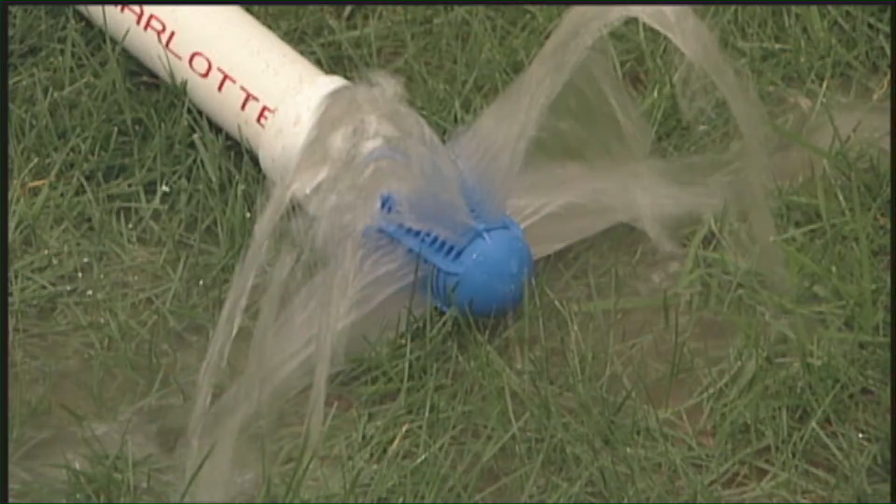So does a homeowner have a choice on whether they go with a sump crock and discharge it outside, or a sump crock that could actually discharge it into the storm sewer? Yes, in this situation you would, because they have a storm sewer lateral in this house. We could have taken the sump crock and discharged to the storm sewer lateral. We elected not to, this area in the house worked better. He had room in the backyard to discharge to, and it worked out better from an electrical standpoint.

This is a very important topic we're dealing with on today's show, and we're getting the awareness out there. It's great for homeowners to understand that if you're in the MMSD service territory, there's some funding available to offset some of the costs. We have competent contractors like yourself that can assist, and at the end, the whole community wins. Well, I really appreciate you coming on today's show and walking us through this very important topic. We'll see you again on another show. Thanks, Stu, it's been my pleasure.